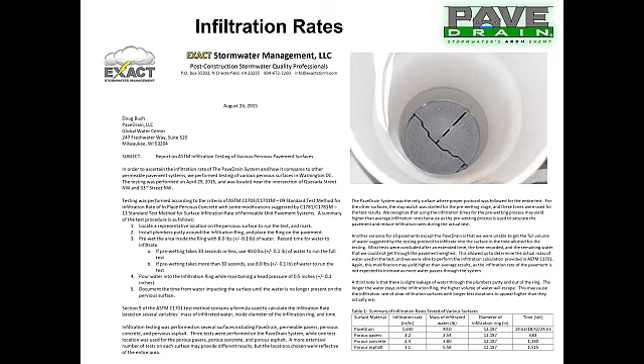Most people around the country view anything less than 8 inches per hour as a failure mechanism or needs maintenance to be completed on. That number comes from a hurricane type event as established on the East Coast. This next video we're going to show you will show all the different nuances of the different permeable systems that are out there. Exact stormwater management.

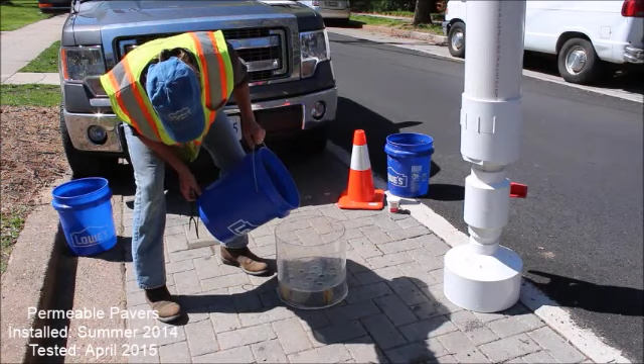I do a lot of stormwater BMP installations, maintenance, and testing. I'm here today in Northwest DC, hired by Ernest Maier to do some testing on porous pavers, porous asphalt, porous concrete, and PaveDrain. Ernest Maier is our licensed block manufacturer in the DC area. They also supply the permeable pavers and the pervious concrete on this. Now, Sean is using a diffuser on his test to spread the water out across the whole loading.

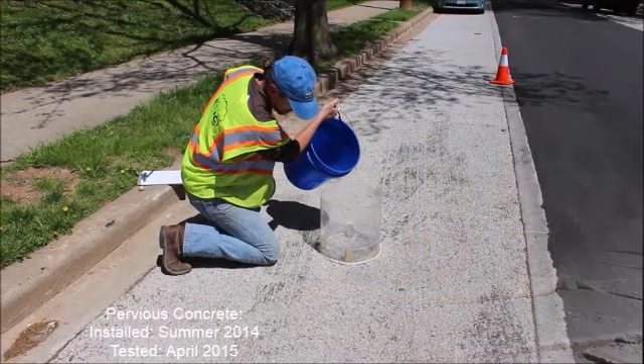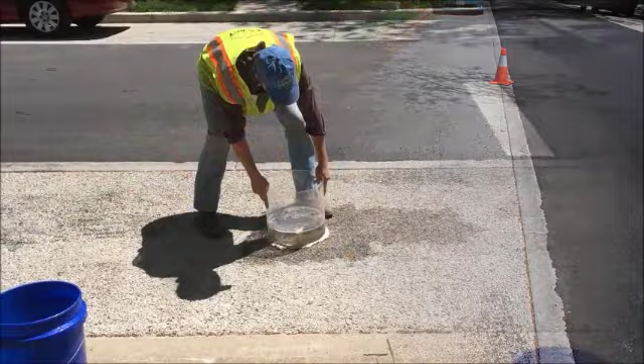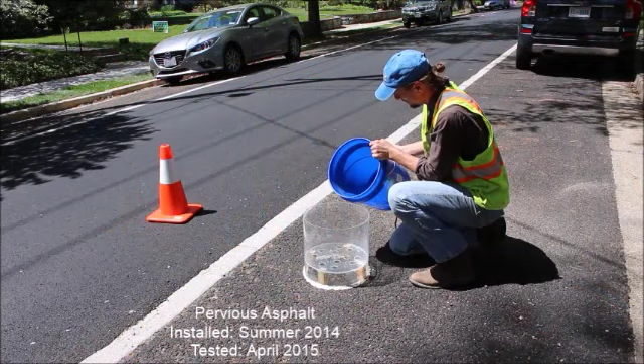You can see these pavers were installed in 2014 and tested the following spring. One key to this whole test, nobody was allowed to do any maintenance on this. And you can see that that was pretty much what was going on as this water was running down on the pervious concrete as opposed to infiltrating in. Pervious asphalt, again, installed in 2014, tested the following spring.

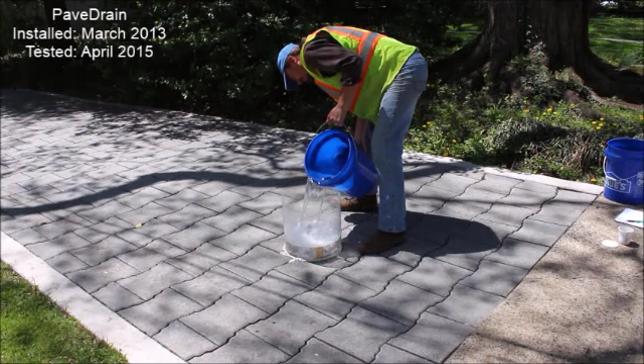Last and not least is us. Now, we were installed a year ahead of everybody, and much to our chagrin, we were installed underneath a tree canopy with all the debris that was dumped into there. We tried to fight it, but lost.

Today, the porous pavers that we started with, we got 3.2 inches per hour infiltration rate. Then we went to porous concrete. We got 2.4 inches per hour. We went to porous asphalt. We got 3.1 inches per hour, and we're here at the PaveDrain, and we got 1,640 inches per hour infiltration rate. This is all according to ASTM C1701. Obviously, an independent study, an infiltration test that was done.

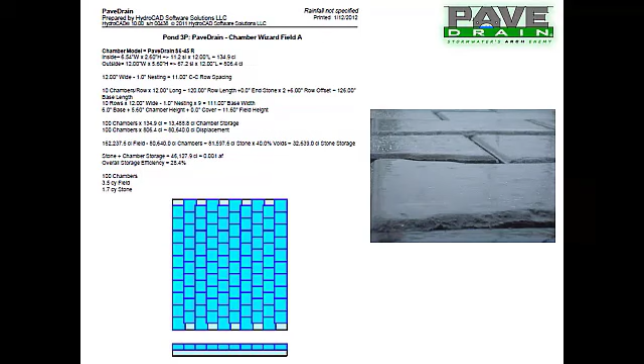Modeling of the PaveDrain system, we are available in HydroCAD so you can actually go in and model this. This is a pond you can model, but it is also a pond you can park on, as this is designed as a parking lot. We also have our own PaveDrain storage and infiltration calculator, which we can readily and easily get to you.

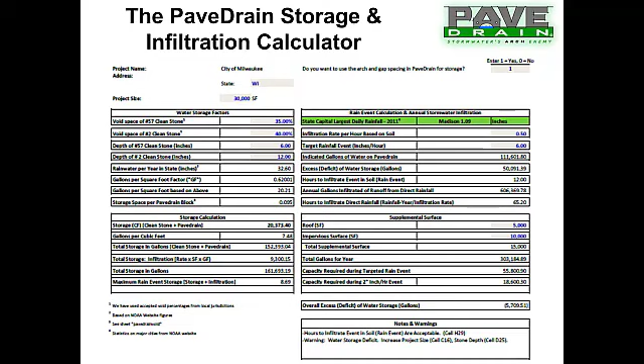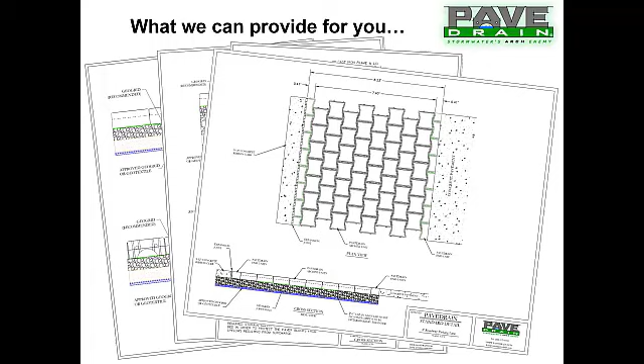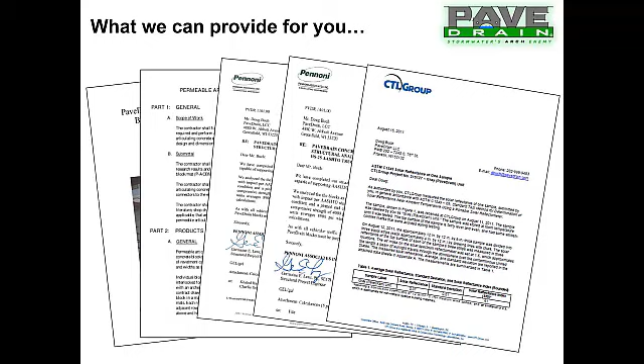Other things we can provide for you is a lot of engineering tests, performance-based specifications, HS20, HS25 load rating, solar reflectance index testing. If there's a test out there that needs to be done, I'm pretty sure we've completed it with PaveDrain to a certain degree all over the country as well.

Now, one of the things we want to get into is maintenance, acknowledging that the Achilles heel of green infrastructure has been maintenance, and our massive infiltration is a tremendous start to this. But we have been involved with multiple studies all around the United States. Started off at the University of Louisville, and then also moved down to University of Central Florida. We'll kind of go through all of these and really show you what's been going on.

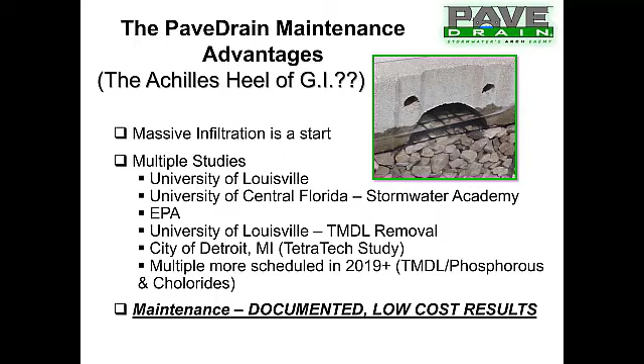So the very first test we were involved with was with the University of Louisville, and it was an assessment of infiltration performance and maintenance of PaveDrain. It started out as a permeable paving or permeable pavement study, and everything else plugged and clogged so fast it turned into a PaveDrain study, which we were very, very pleased about.

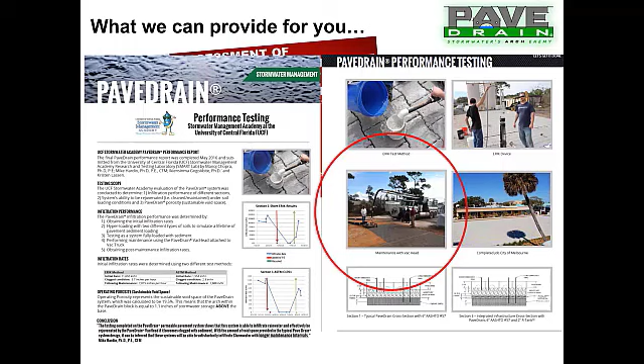From there, we moved down to Florida, and they did a whole other test and documentation at the University of Central Florida, where they really beat you up in terms of maintenance, and we'll show you what they did to this. And that photo and that circled will show you this. So they actually installed the PaveDrain, and then they took a bucket of dirt, topsoil, weeds, you name it, and dumped it right on top of the PaveDrain system.

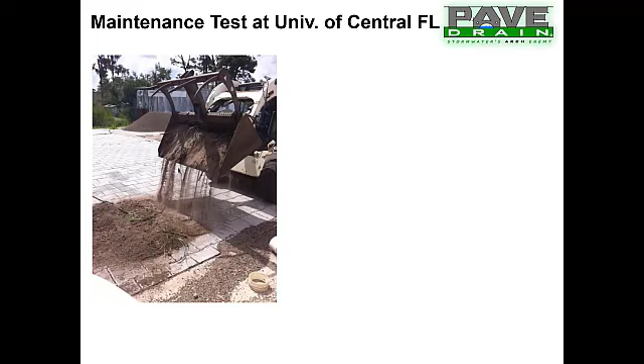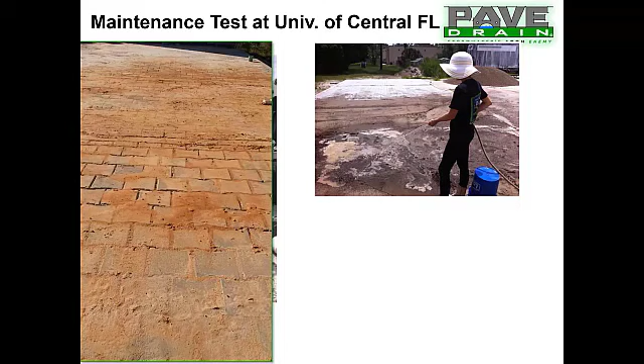And if that wasn't enough, they ended up hosing it into the open joints of the PaveDrain system. And then what they did is they let it cook, let it bake in the hot Florida sun, and then said, come back and clean it. There's a lot of owners out there that let their properties get to this type of maintenance requirements, but we can bring it back.

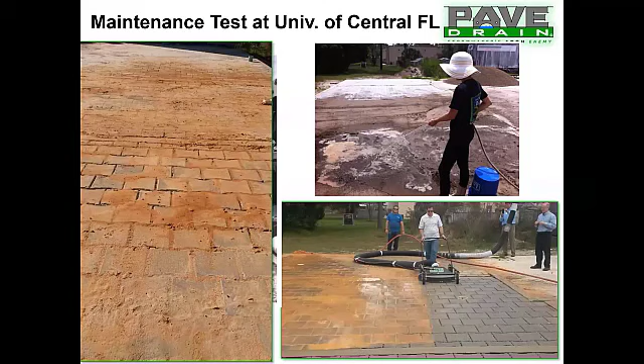We hooked our PaveDrain vac head up to a combination sewer vac truck, and we were able to bring this back to 90% of its original infiltration rate. Most other permeable systems that are out there, if they're clogged to this level, you have a very challenging time to bring them back to any type of infiltration at all. And PaveDrain, we've proven time and again, you can let it go quite some time and it'll still be able to be brought back and infiltrate properly.

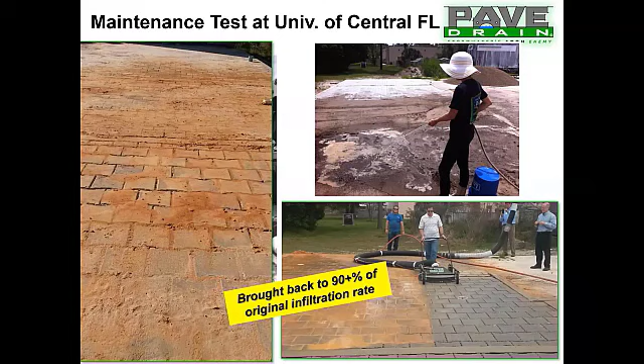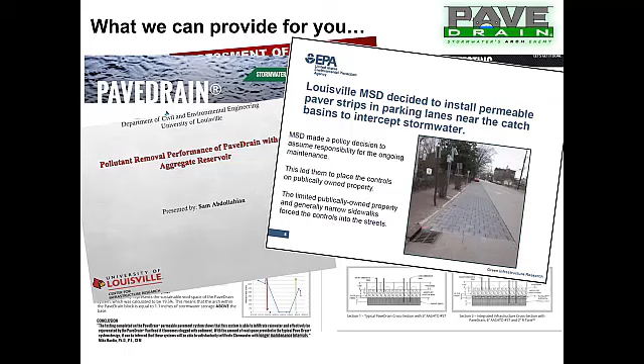So after that became a pollutant removal project with the University of Louisville. And finally, the EPA came out with one of their studies, and these studies are still going on today. And the last test that we want to focus on is the Tetra Tech test that was done for the city of Detroit. It's another whole maintenance study. How far can you let it be clogged before you can bring it back? And they found out the same things that they found out in Central Florida. You let it go a long time and it'll still bring it back.

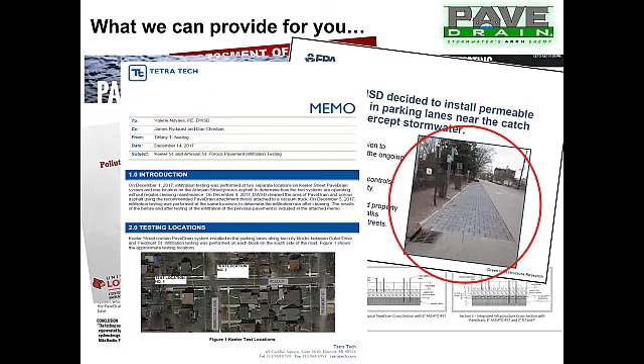The type of documentation and the type of projects that we're really getting into across the country is the picture that's circled on the right hand side of your screen, where we have gray infrastructure, i.e. the inlet, combined with green infrastructure, i.e. the PaveDrain. And this is what is helping the hydrograph within these municipalities flow a little bit better. So this project, Control 19H and 19G.

A lot of the permeable systems out there and a lot of the codes and regulations all talk about not allowing anything more than a 1-to-1 or a 5-to-1 run-on, meaning 5 square foot of traditional impervious surfaces, concrete, asphalt, roofs, running onto 1 square foot of a permeable surface. This study really cranked that up to 16-to-1 and 20-to-1, as you can see there. And why they had that set so low is because of debris, not wanting that amount of debris to get in and plug these systems very fast. We ended up getting this up to 20-to-1. Now, we know full well that there's going to be a tremendous amount of debris that gets into this. So how does an owner cost effectively maintain this?

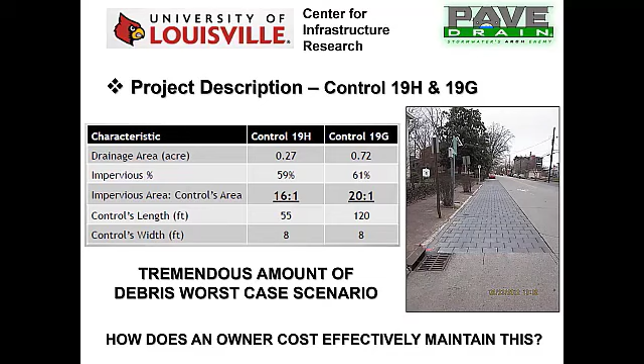So this is what 19G and 19H look like. There's a 10-foot cross section in here, all lined with the geotextile. Up at the top, there's about a 3-inch layer of 57 stone. You'll see a little black line on top of that, the bigger stone there. They put a geogrid in there. And again, it was about an 8-foot width. They put piezometers into this to document how much storage and how much volume was being captured, which gave us some ideas for later application. But it was a true electronic measurement.

And both of these structures, 19G and 19H, confirmed that we were getting 100% of the runoff, or a 1-to-1 ratio. The problem is, the first 10 months, it didn't rain. We only got about 40,000 gallons. Now, the last 2 months, it did nothing but rain, and we more than made up for that.

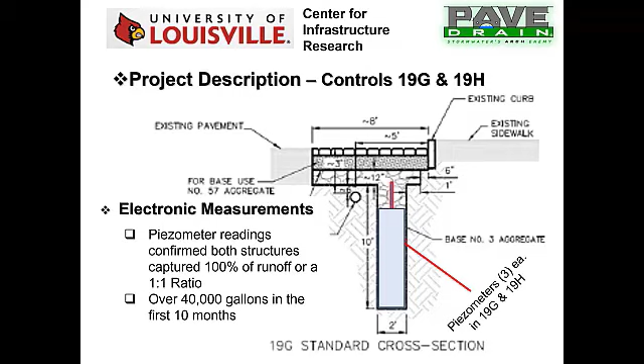So keep that 40,000 gallons in mind for this as we started off doing this. Clogging and maintenance, we know it is going to occur. There's a way to do some visual inspections. Unlike most other permeable systems, PaveDrain can actually tell you when it needs to be maintained. You can drive over it, walk over the top of it. The joints are completely plugged like you see in this picture. Probably time for some maintenance.

You got a little problem with this going along, but we'll show you what we've come up with to help solve this for owners, so this is less subjective. Because even though we had projects that looked like this and they would get heavily, heavily rained on, they still wouldn't puddle. So how do you really know when they need to get maintained? And we'll talk about that here in a little bit.

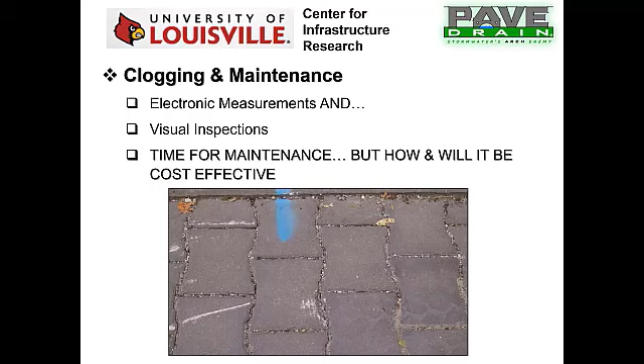We tried different things. We really did not know exactly how to maintain this. So the first thing we tried was a vacuum truck. You'll notice the quotes. What we later found out was this was an Elgin Crosswind, otherwise known as regenerative air. And this is really nothing more than a great big leaf sucker. And it just didn't have enough oomph to pull up the debris within the joints of the PaveDrain block. But we were told it was a vacuum truck.

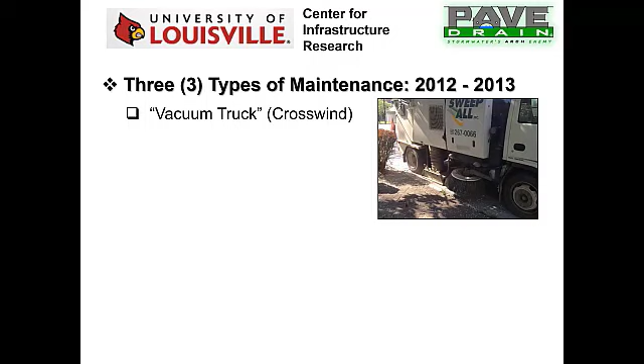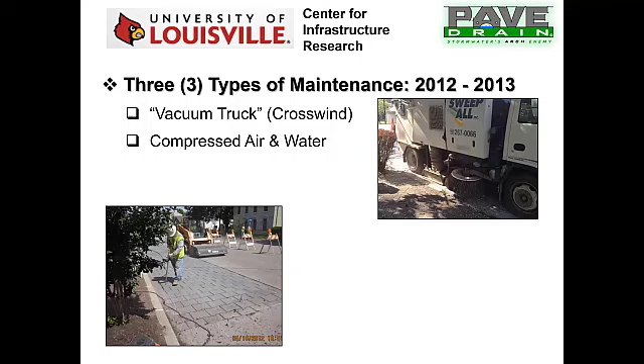From there, we went to compressed air and water, where we blew out the joints of the PaveDrain. It kind of worked, but it really didn't, because as much debris as we pushed out, it was also getting shoved back down into the open aggregate section. And you can see in the bottom of the photo, it was also blowing it down out of the joints. And as soon as it rained, it washed it right back in. So we really didn't accomplish anything by that.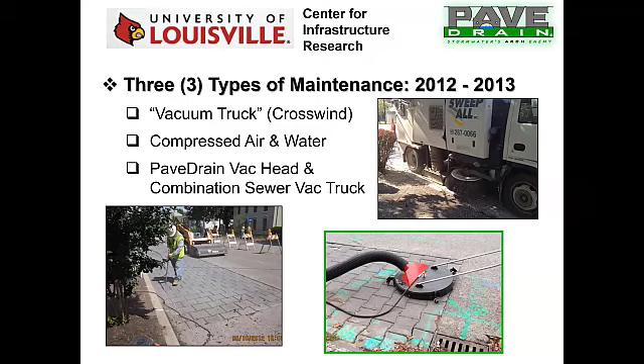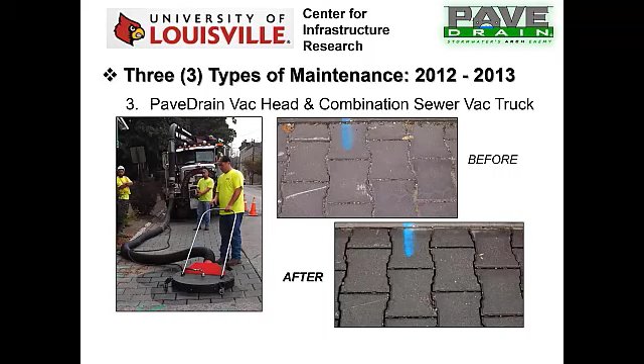And what we ended up doing was the city said, you guys are close, but you got to vacuum it out. So we worked with another supplier, and we created the PaveDrain vac head that can get hooked up to a combination sewer vac truck. And this vac head worked spectacularly. It really solved our problem. It vacs stuff out. But like anything, there's some nuances and things that we had to do. The results on this were really quite amazing for us. Hopefully this video will start.

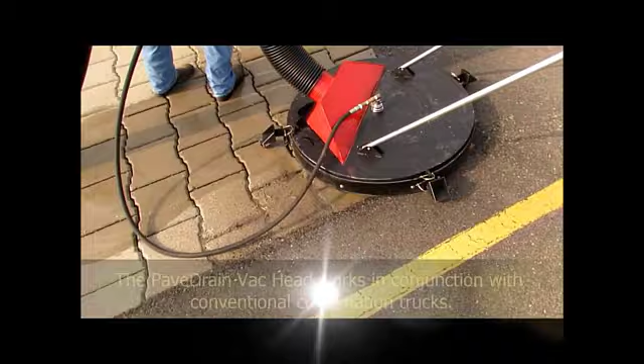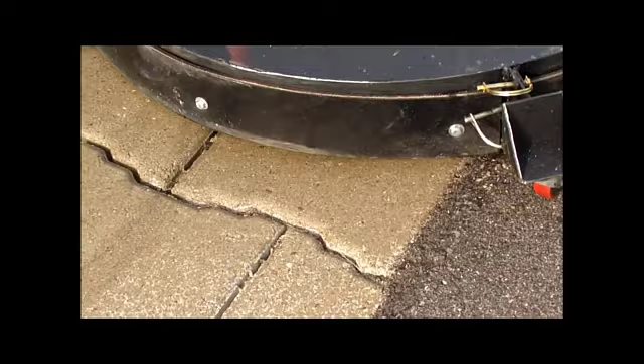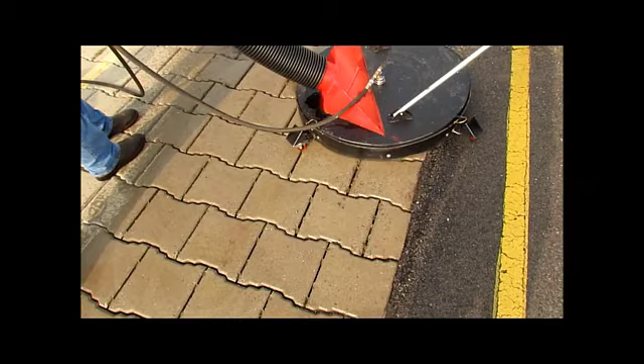Like anything, when you're testing it, you make some mistakes. So the very first mistake we made on this was we made the wheels way too small, and we had to rectify that. So this was our very first run that we did, and this is back at Ford Motor Company. And so again, they hadn't done a whole lot of maintenance out there, so they were giving us free rein to go out there and do some testing on this. And as they're going along here, you'll see what is going on underneath there. Nick will pick up this PaveDrain vac head and flip it up and show you what's going on.

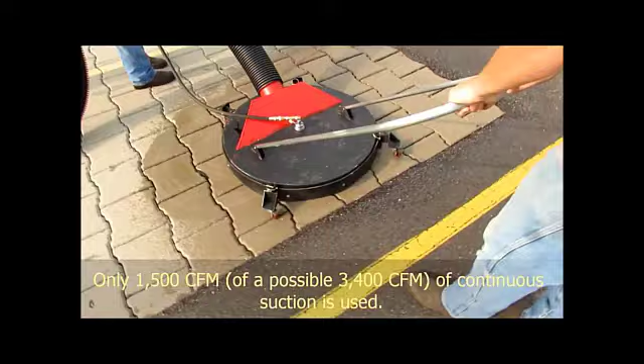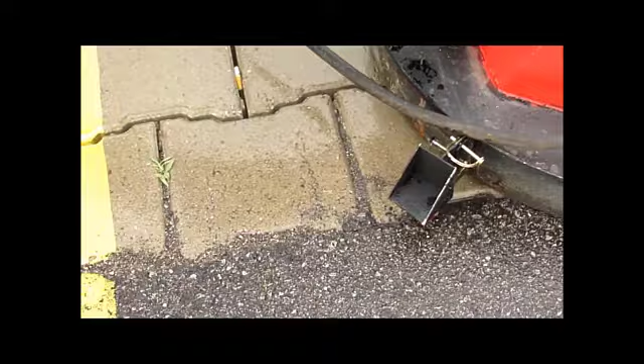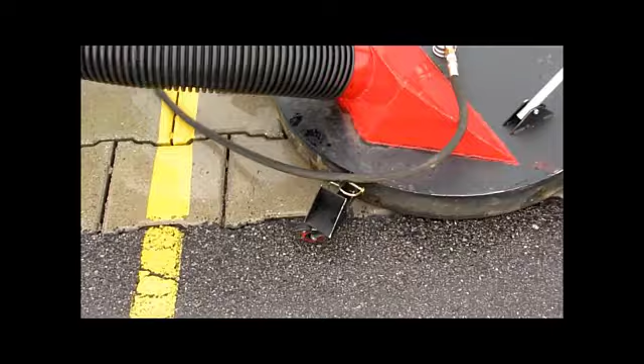The water source for this is coming from the combination sewer vac truck, and about 1,000 PSI is being pumped out of that circular head. This vac head really doesn't work on anything else. Permeable pavers, it really struggles with that because all the rocks and debris damages the wands. Pervious concrete and asphalt, it does okay, but it tends to damage them just from the amount of pressure on that water. But you can see from this that it has sucked out everything, including that little weed and the cigarette butts, which are pretty common out there.

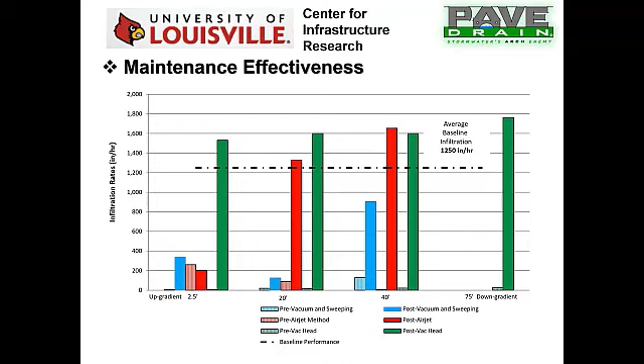This is the maintenance effectiveness of doing this. The dashed line on there represents the average baseline infiltration rate, which was established by the University of Louisville at 1,250 inches per hour. They determined that anything that was above that was just kind of crazy. But you can see by the green lines in the post-vac head test that we got those green lines way up over that, even after air jetting and all the other stuff that we did, the mistakes we made. We still were able to get it back to flowing brand new.

The conclusions: the red line here represents the cumulative surface runoff. The black line represents what was captured. Now, if you remember from a few slides earlier, it didn't rain a whole lot the first 10 months. The last 2 months, all it did was rain, and in a very small area, 1,500 square foot, we captured 250,000 gallons of water across, like I said, 1,500 square foot.

Now, when you start looking at this on a citywide scale, and you start putting in 1,000, 1,200, 1,500 square foot of PaveDrain, upgrading every inlet in the city, you can drastically reduce the hydrograph that is affecting these flood-prone areas within these cities.

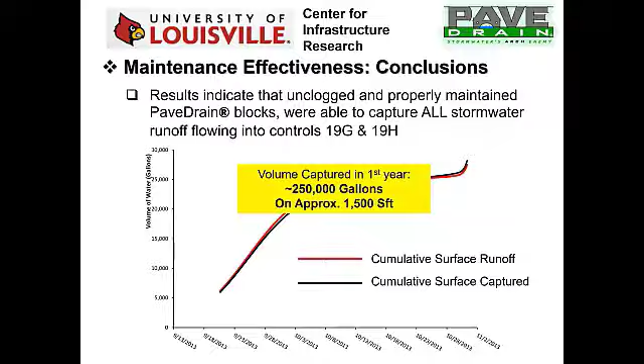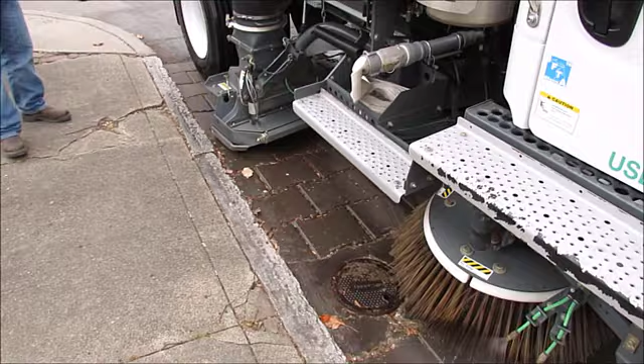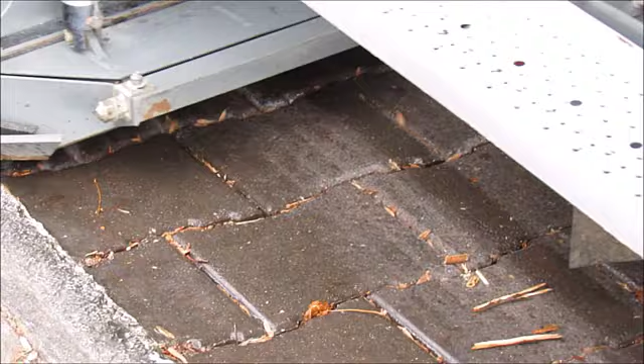The next thing that started happening was these municipalities started coming to us saying, we just don't like having our laborers or our workers outside of these trucks. We need something that's mechanical. So we went back to the vacuum trucks, and we actually found what is called a pure vacuum truck. This particular brand is an Elgin Whirlwind or Mega Wind type of truck.

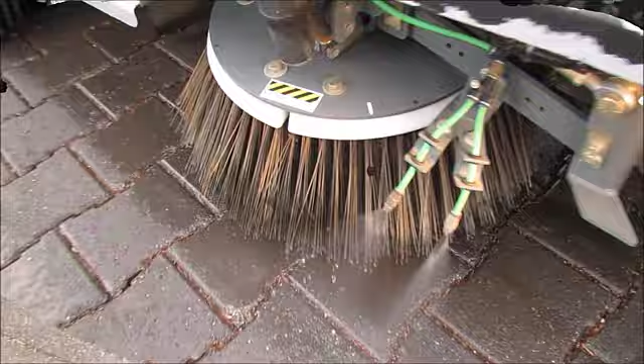That's a port down there that is only about 2 inches wide and about 18 inches long. Tremendous amount of suction. You can see a little bit of water being sprayed on top of this debris to suck that up. A lot of organics in this. This thing will actually move the blocks around. There's so much suction coming up out of there. You can kind of hear them chinking and banging around. That truck's only going along at about 2 to 3 miles an hour.

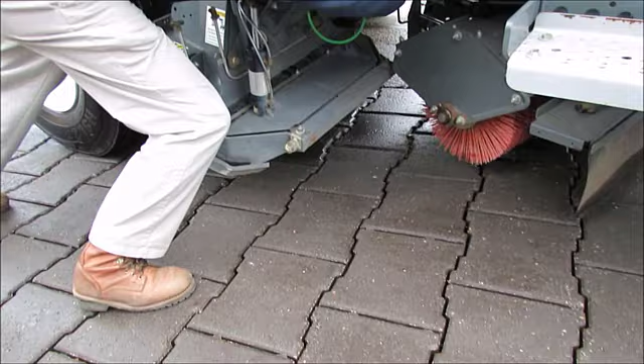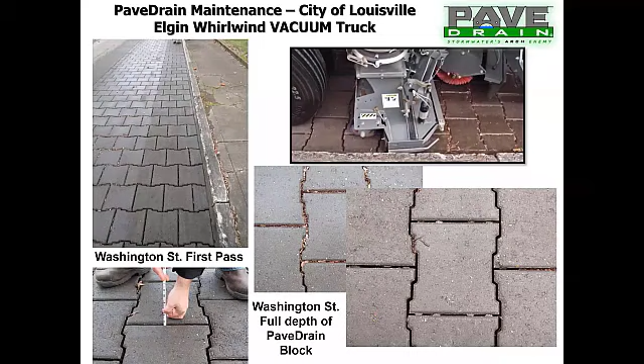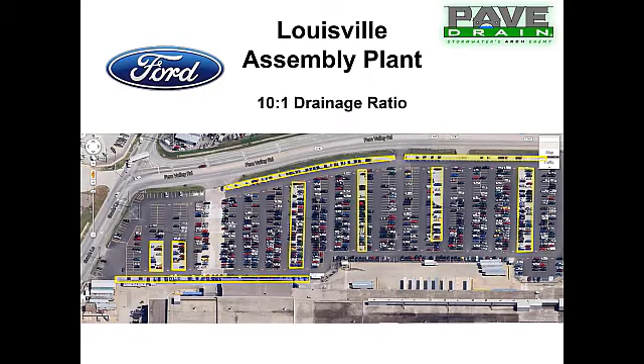What we wanted to do is go back out to Ford and do one that had a little less organics. Now this is a Google Earth shot showing the pave drain outlined in yellow. All of the asphalt areas drain to the pave drain there. This is a staggering amount of debris, a lot of mud, dirt, grit, grime, you name it was on top of this. And again, Ford had never maintained this. We're showing the Elgin Whirlwind there.

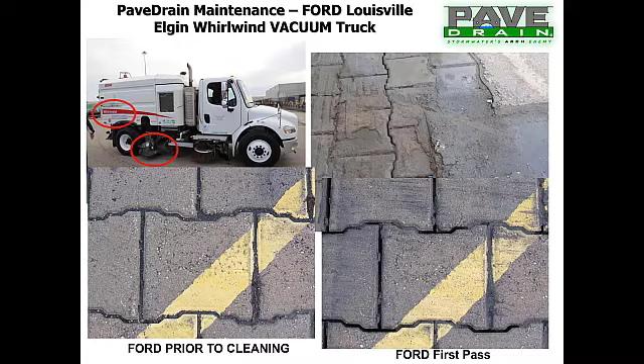And just to give you a scale, we threw a set of keys down just to show you how much dirt and sedimentation had been accumulated on the pave drain in about, let's call it a 6 to 7 year period at this point in time. The picture on the left is showing prior to cleaning and just how impacted this was with dirt and debris. The first pass was over the top of that on the lower right-hand corner. Then we go inside of that, and you can see what it looks like inside of this tank.

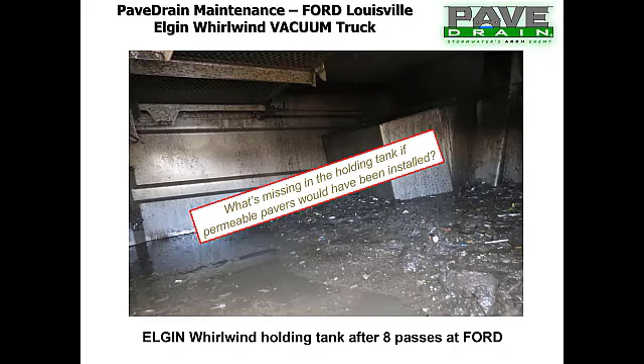Maintenance effectiveness and conclusions. Performance can be restored. The type of maintenance is important. It's got to be vacuumed. When to maintain is becoming the next step. And also, how much stormwater are we capturing? You know, there's been a lot of green infrastructure that's been designed over the years, and I'm sure a lot of us have really no idea exactly what's been going on and how much stormwater we've been capturing.

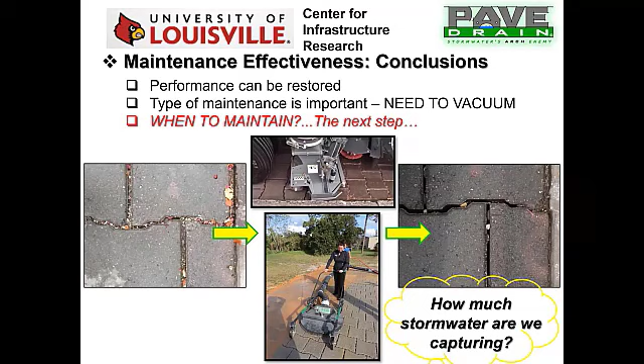We've tracked a few jobs within the 3.5 million square feet of pave drain we've installed around the country, and on just a small smattering of jobs, the amount of gallons we've captured is kind of staggering. But we wanted to be a little more definitive on that. So a few years ago, we started working with P4 Infrastructure and their owner, Chris Foley, to dial this in. And at this point in time, I'm going to turn this over to Chris Foley.